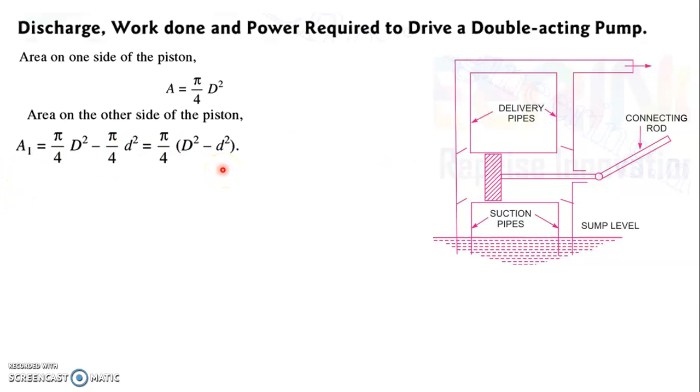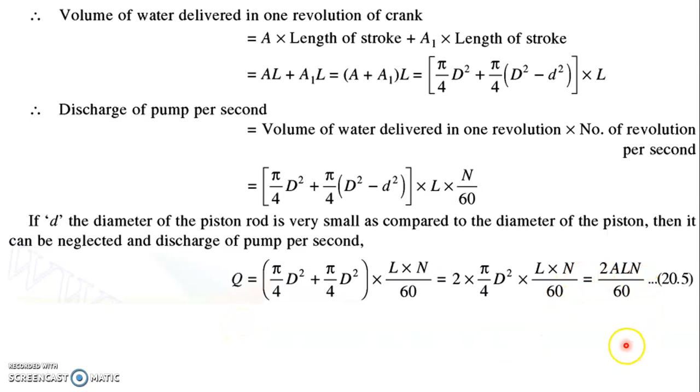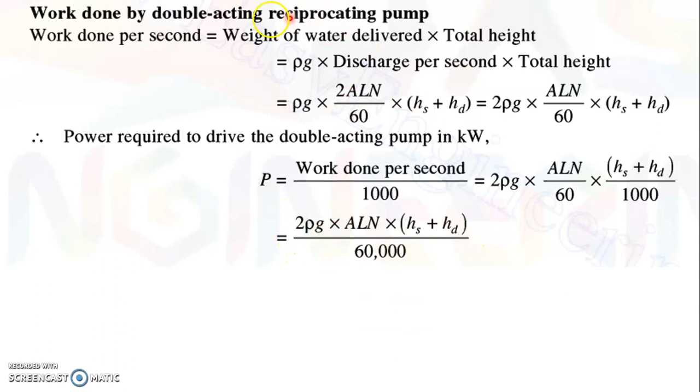So in every equation it will come, but in general we will neglect the small d and we will be writing pi by 4 D square plus pi by 4 D square. Q is equal to ALN by 60 of the previous equation. Now it will become 2 into ALN by 60, the equation for the double acting reciprocating pump. And for the work done equation, everything will be multiplied by 2. Here 2 ALN by 60, work done 2 into ALN by 60. Everything is multiplied by 2 for a double acting reciprocating pump.

The next thing we are going to discuss is the slip. Slip means there is a difference between theoretical discharge, for which we have the equation Q equals ALN by 60, and actual discharge.

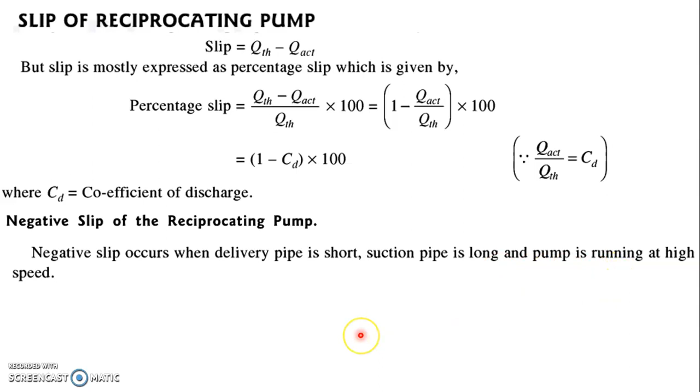And classification of reciprocating pump based on the double acting, single acting we have already discussed. If we are dealing with water on one side of the piston, we call it a single acting pump. If we are dealing with water on both sides of the piston, we call it a double acting reciprocating pump.

And if we are dealing with more than one cylinder; we have discussed only single cylinder reciprocating pump. If we are dealing with 2 cylinders at the same time, we call it a double cylinder. All of you know that because many bikes are coming with V engines and many cars are available with 4 cylinders. So you know the difference.

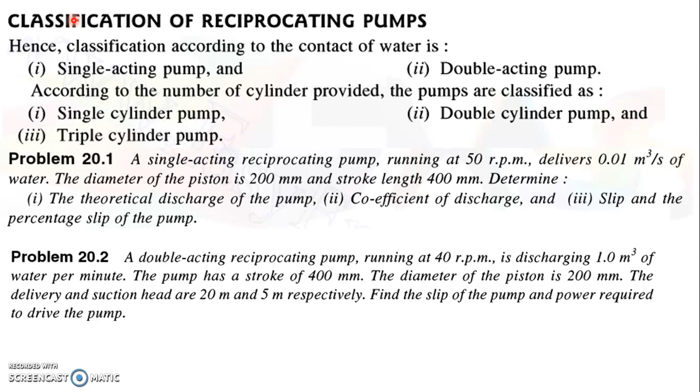Okay. And here are two problems. These two problems are direct substitution. So I hope you will complete this as homework, and if you have any doubt, you can refer to the textbook or you can ask me. Okay. So please take down these two problems for your homework.

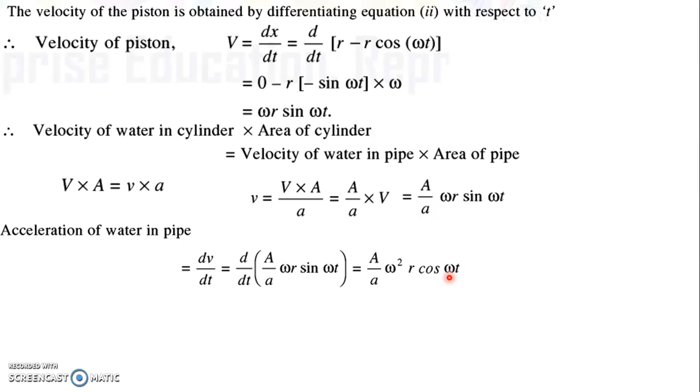So force equal to mass into acceleration. So mass equal to density into area of the pipe into length of the pipe. So it will give us the mass of the volume. So rho a l into A by a omega square r cos omega t. This is the force. I want to calculate the pressure.

So pressure equal to force by area. So again I am dividing the whole equation with the area of the pipe. So what is the intensity of pressure inside the pipe? So rho a l A by a omega square r divided by area of the pipe. It's already mentioned that area of the pipe is equal to small letter a. So dividing by small letter a, we are cancelling the two a's here. So rho l into A by a omega square r cos omega t. This is the intensity of pressure.

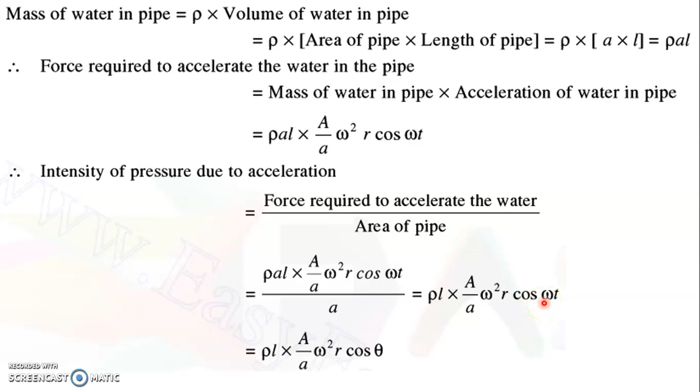So I want to calculate the pressure in terms of head. So P is equal to rho g h, or H is equal to P by rho g. So H can be written as pressure divided by rho g. So rho l A by a omega square r cos omega t. Omega t is replaced by theta. So divided by rho g. So rho and rho get cancelled. L by g, A by a omega square r cos theta will give us the equation for head due to acceleration. So it is a general equation.

If I am writing this equation for head in suction pipe, H will become Has, L becomes length of the suction pipe, Ls, and a becomes area of the suction pipe, as. If we are dealing with the delivery pipe, Had, head due to acceleration in the delivery pipe is given by length of delivery pipe divided by gravity into A, the area of the cylinder, divided by area of the delivery pipe into omega square r cos theta.

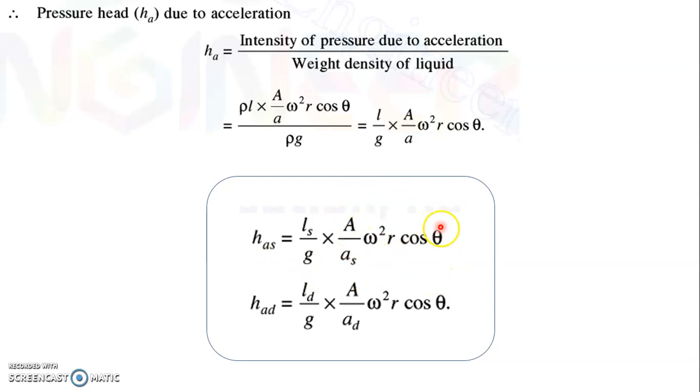So we got two equations. Now we are going to check when it will become maximum or minimum. So we got the value head due to acceleration Ls by g, A by as omega square r cos theta. As the crank rotates, the only variation is the angle theta. So initially the angle is equal to 0, starting from the point A. When it becomes 90, it will reach the point B, and when it becomes 180, it will reach the point C. So at the beginning of the suction stroke, theta is equal to 0. At the middle of the suction stroke, theta is equal to 90. At the end of the suction stroke, theta is equal to 180.

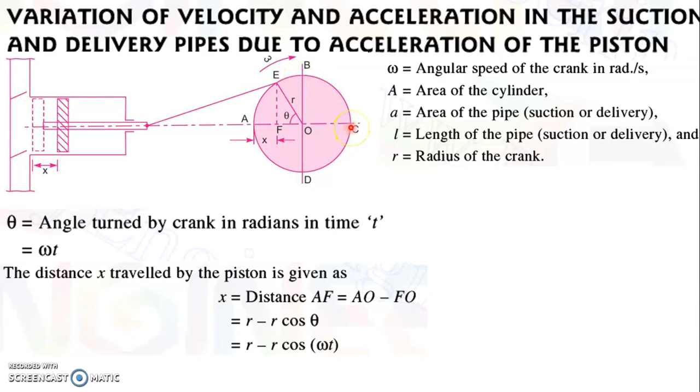So when theta is equal to 0, cos theta is equal to 1. So maximum acceleration will be at theta equal to 0, at theta equal to 90 acceleration is equal to 0, and at theta equal to 180 acceleration will become negative. So minimum acceleration will be at the end of the suction stroke. So maximum acceleration is at the beginning of suction stroke, and minimum acceleration at the end of suction stroke. So maximum pressure head due to acceleration is given by L by g, A by a omega square r.

So it's a very important derivation. You just go through and try yourself.